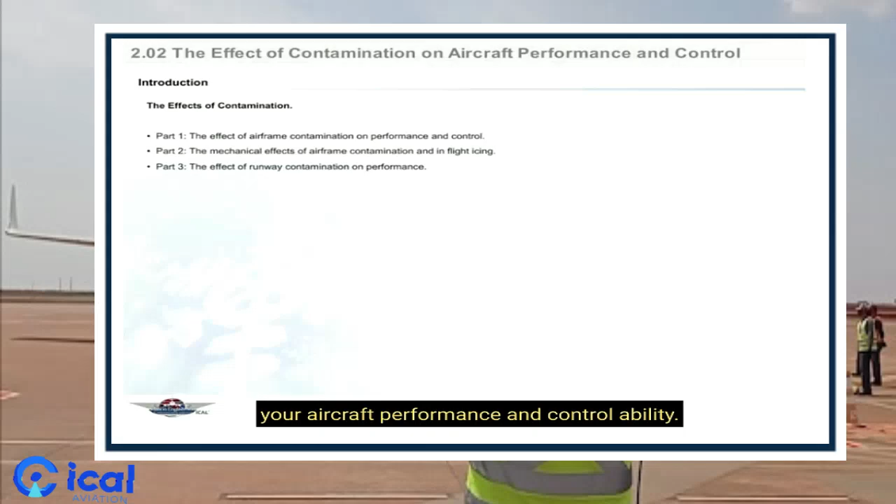We look at the effects of snow and ice contamination on aircraft performance and control. Your learning objectives for this lesson are listed here. It's important to appreciate how and by how much ice and snow can affect your aircraft performance and control ability.

So, for ease of understanding, we have separated the effects of contamination into three categories: the effect of airframe contamination on performance and control, the mechanical effect of airframe contamination and in-flight icing conditions, and the effect of runway contamination on performance.

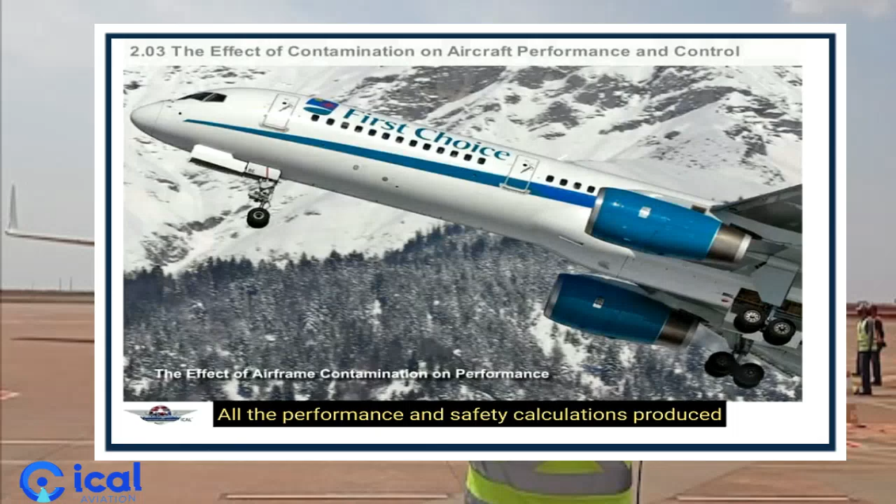All the performance and safety calculations produced by your aircraft manufacturer are based on the assumption that the aircraft is clean. To put it another way, none of your performance calculations will be valid if your aircraft's critical surfaces are contaminated. So, in Part 1, to emphasize this point, we will look at how quickly and by how much even small amounts of airframe contamination can degrade performance.

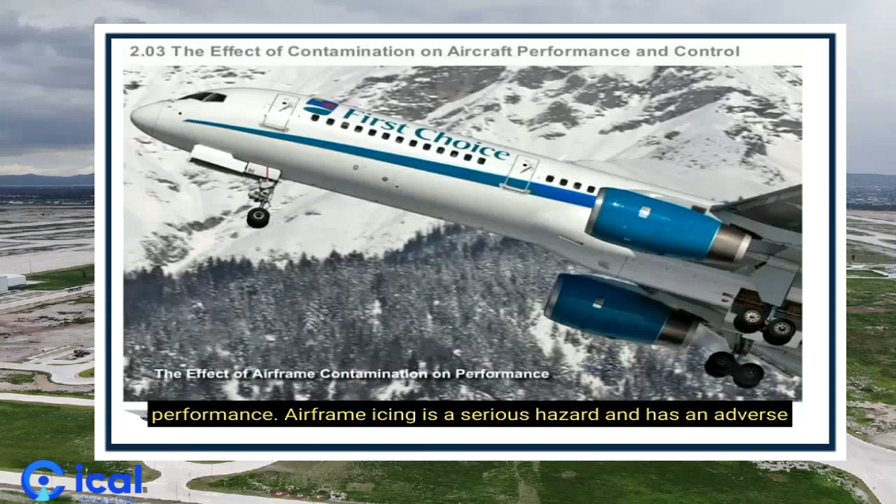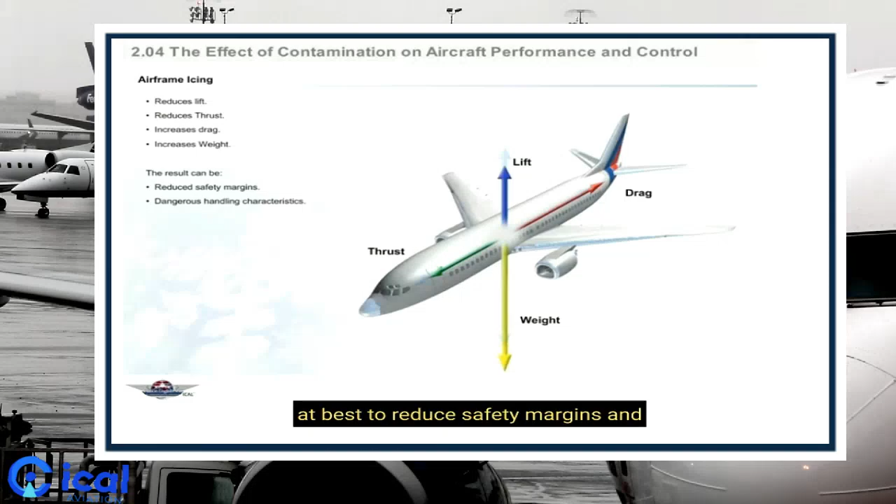Airframe icing is a serious hazard and has an adverse effect on all four forces acting on the aircraft. Degraded aerodynamics and reduced thrust, combined with increased weight and increased drag, can lead at best to reduced safety margins and at worst to dangerous handling characteristics. Let's look at some of the effects in more detail.

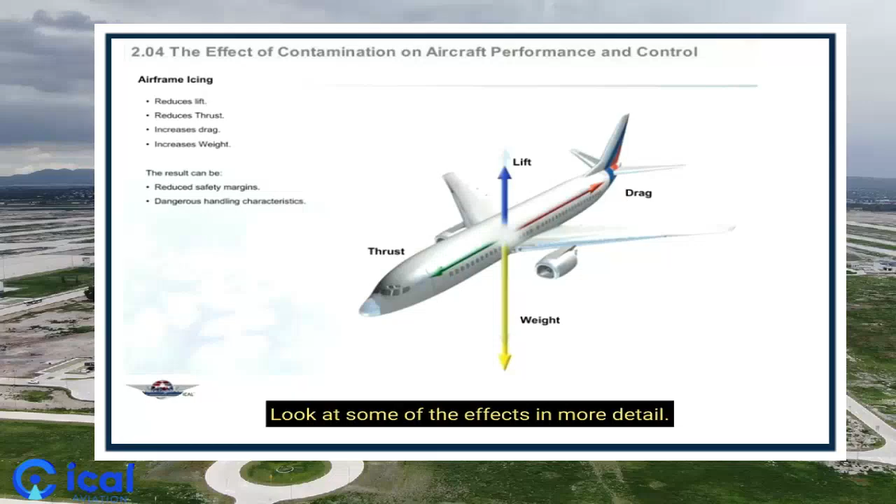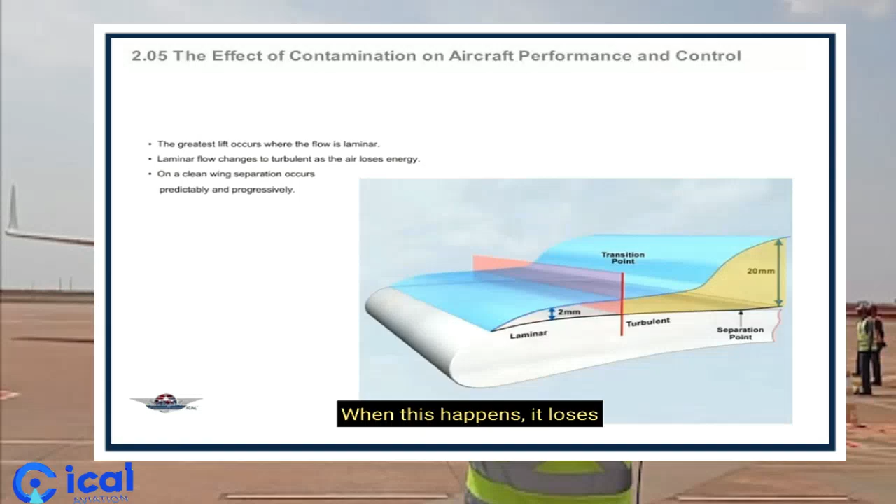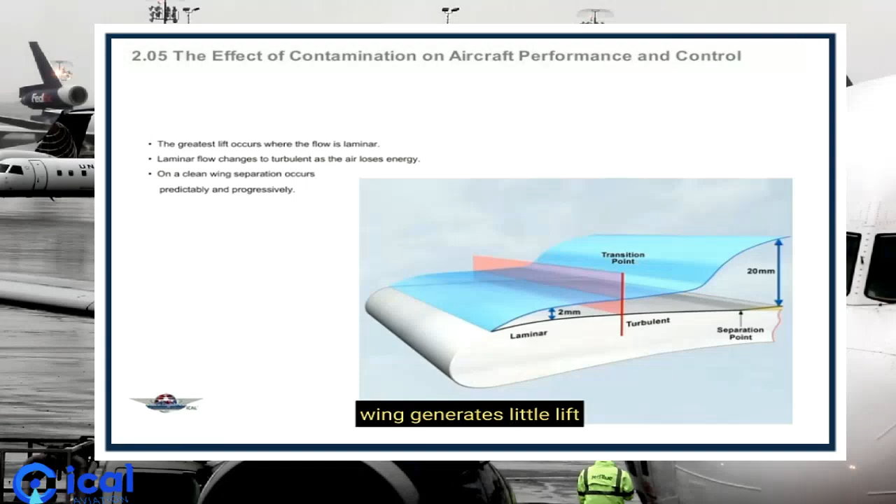The vast majority of lift is produced where airflow over the upper surface of the wing is laminar and attached. Laminar flow breaks down when the air in the boundary layer begins to lose its energy. When this happens, it loses speed and becomes turbulent. The boundary layer thickens and eventually flow separates from the upper surface. Beyond the separation point, the wing generates little lift. On a clean wing, the designer ensures that separation occurs predictably and progressively.

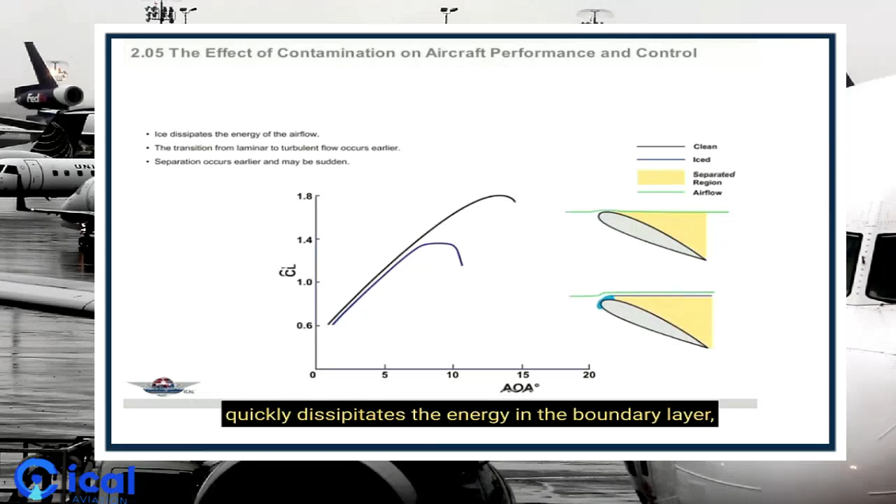The story is very different if the wing is contaminated with ice. The increased surface roughness quickly dissipates the energy in the boundary layer, leading to earlier separation and loss of lift. Most critically, separation is no longer controlled and progressive. It will occur at a lower angle of attack and may happen very suddenly.

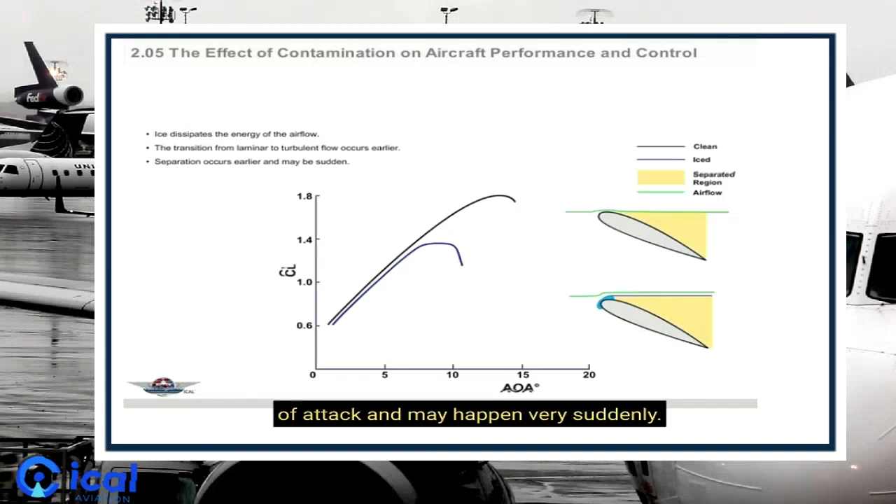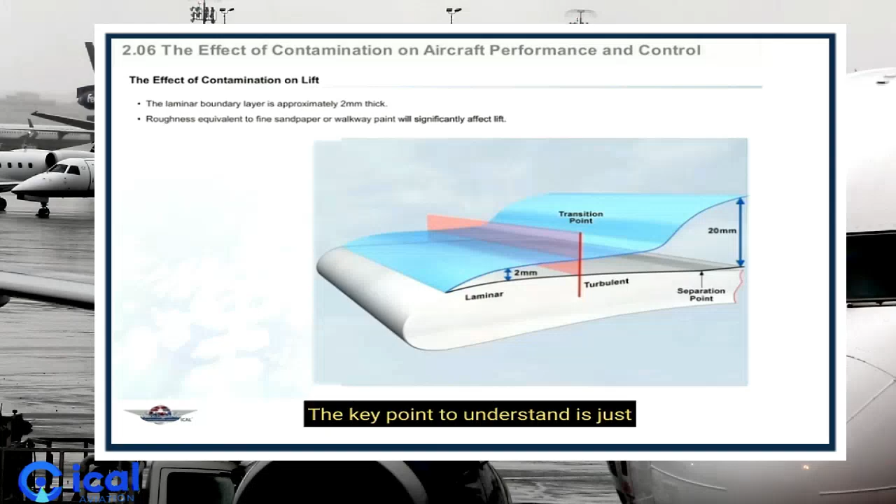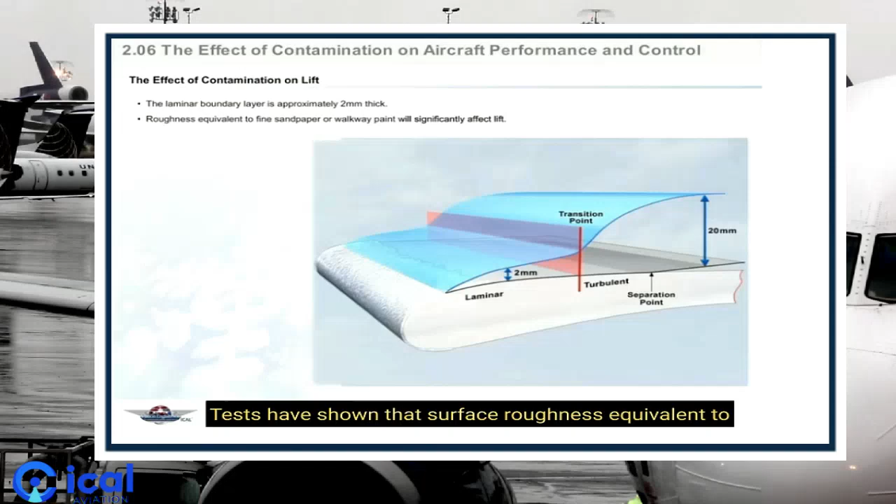The key point to understand is just how little surface roughness is needed to disrupt the laminar boundary layer. The layer is only a few millimeters thick, so even a very small amount of frost or ice will have a very large effect on the ability of the wing to generate lift. Tests have shown that surface roughness equivalent to fine-grade sandpaper or wing walkway is enough to produce a significant degradation of lift.

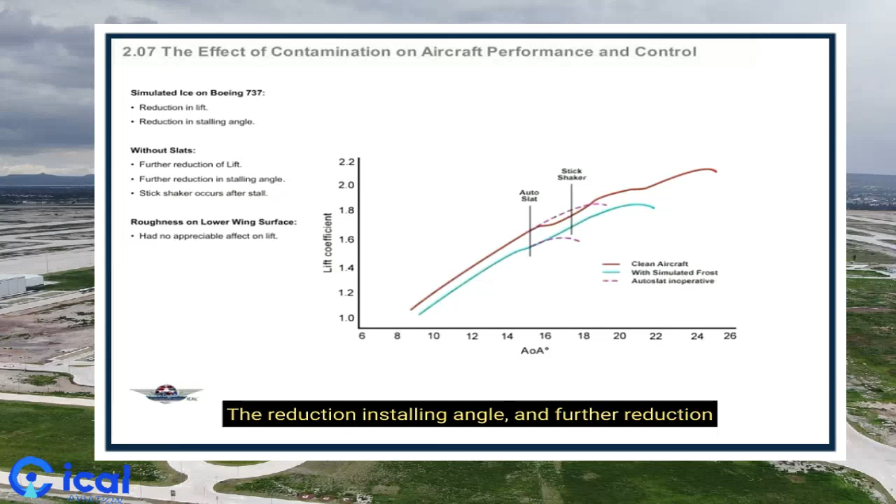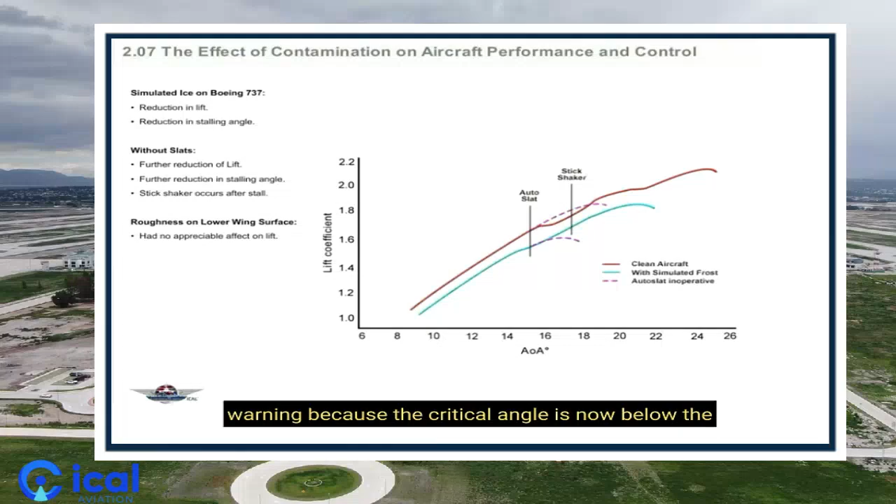The graph here is the result of practical flight trials carried out by Boeing using wing walkway paint to simulate frost. Notice the reduction in overall lift, the reduction in stalling angle, and the further reduction if the slats are unavailable. In the latter situation, there will be no stall warning because the critical angle is now below the angle of attack that triggers the warning.

Boeing also found that simulated frost on the leading edge alone caused almost the same effect as contamination over the entire upper wing surface. By contrast, roughness on the lower wing surface produced only small effects.

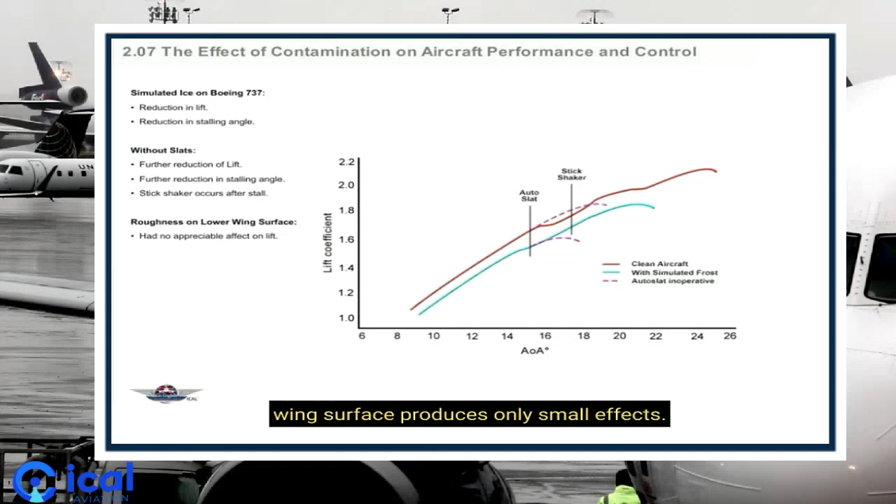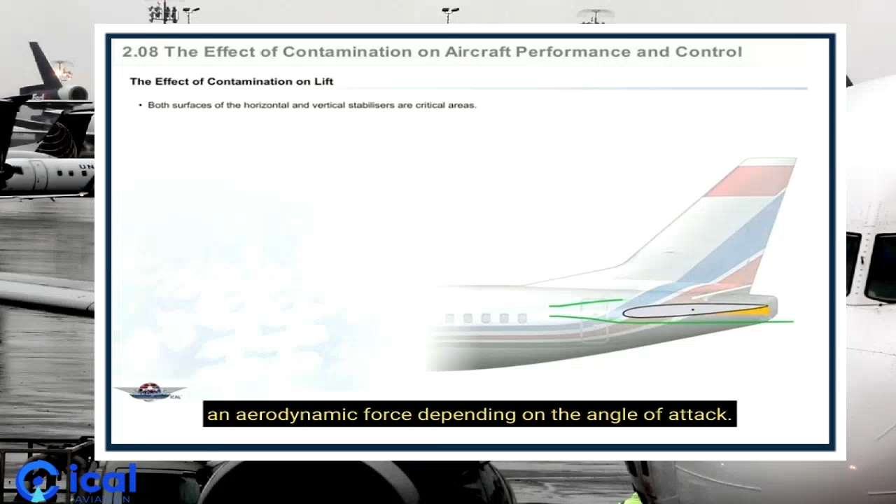Unlike the wing, both surfaces of the horizontal and vertical stabilizers can suffer serious degradation. This is because either surface is used to generate an aerodynamic force depending on the angle of attack. For this reason, both surfaces of the stabilizers must be kept completely clear of all contamination.

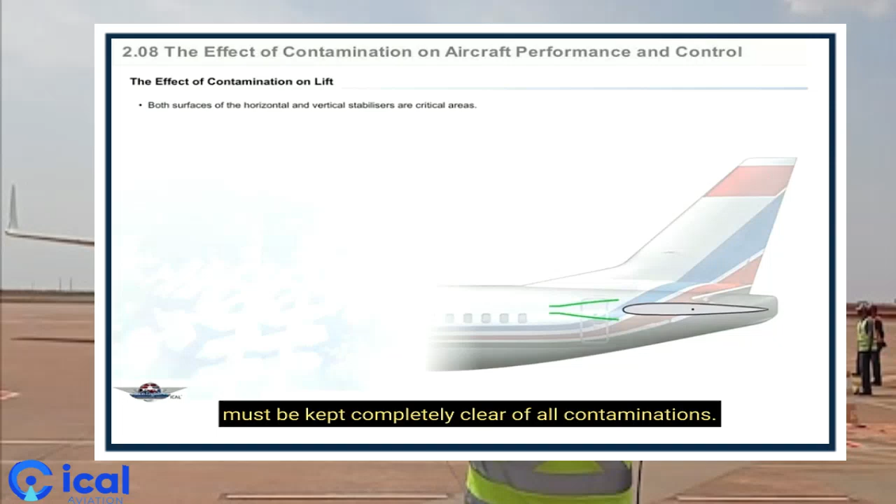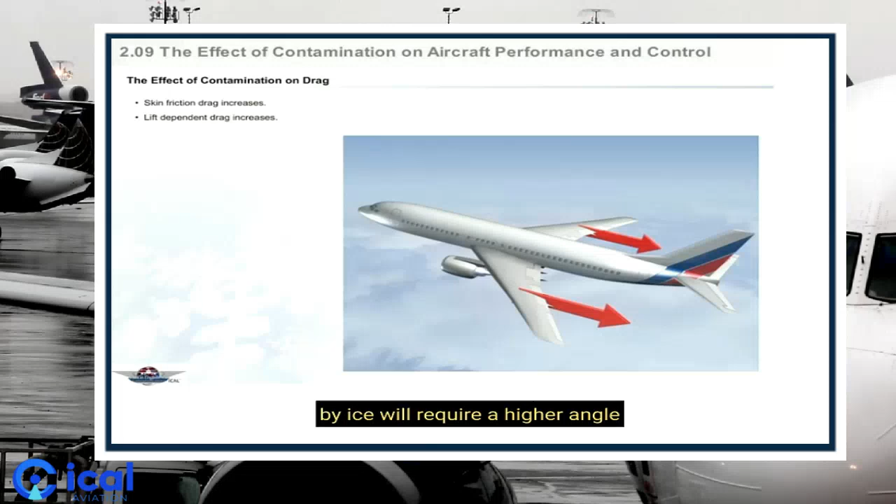Ice contamination also has an adverse effect on drag. Firstly, the surface roughness of the ice will increase skin friction. Secondly, the reduction in lift caused by ice will require a higher angle of attack to lift the weight. This increases lift-dependent drag. The effect of frost contamination on drag may be relatively modest, but we will see later in this lesson that other types of icing can cause a huge increase.

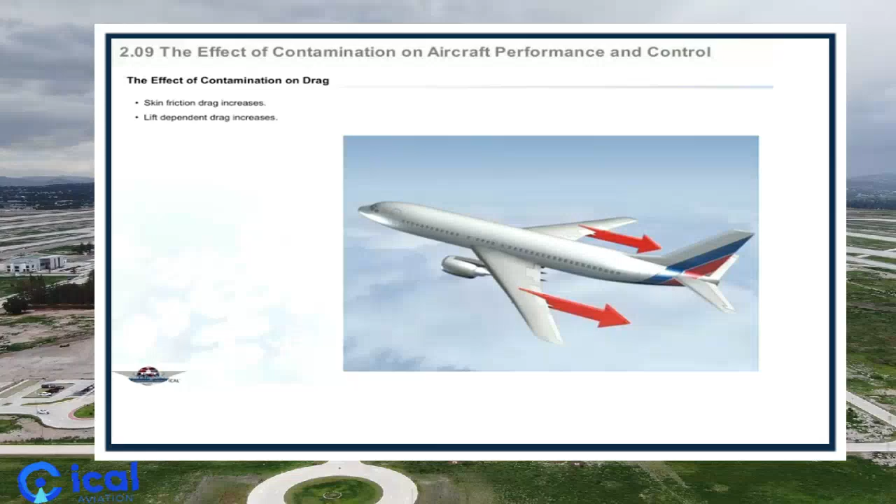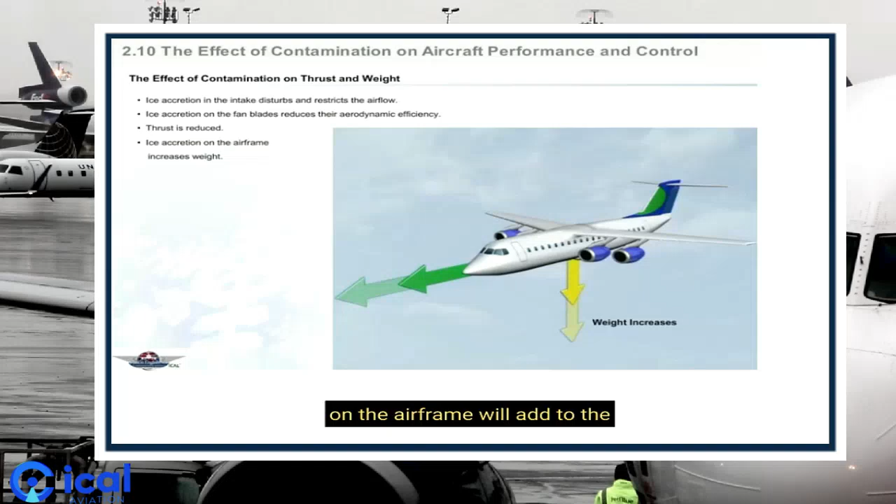As well as reducing lift and increasing drag, ice also affects the other side of the equation. Ice accretion in the intake and on the fan or propeller blades will reduce air mass flow and aerodynamic efficiency. This reduces thrust and gives you less margin to counteract the increase in drag. Similarly, the weight of the ice accumulating on the airframe will add to the problems already caused by loss of lift.

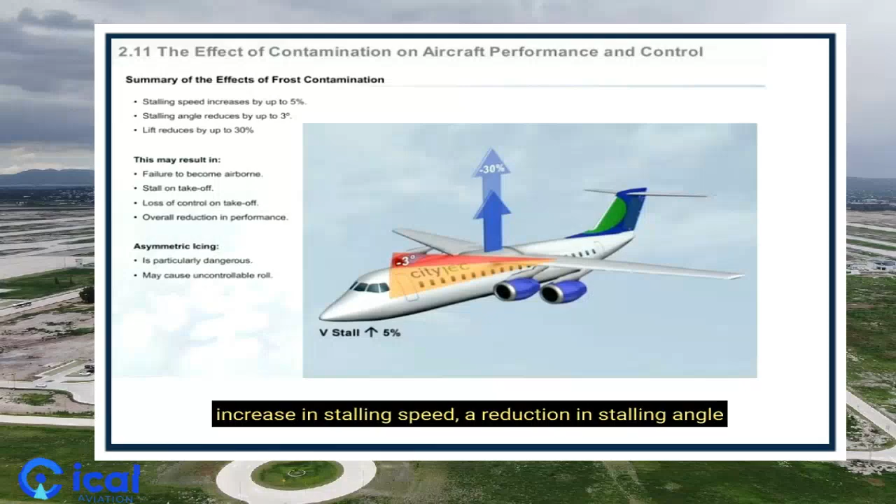Frost on the upper wing surface will cause an increase in stalling speed, a reduction in stalling angle by up to 3 degrees, and a reduction in lift of up to 30%. Drag and, to some extent, weight will increase, so the overall effect will be a marked reduction in performance. In extreme cases, you may not be able to climb out of ground effect, or you may stall on rotation.

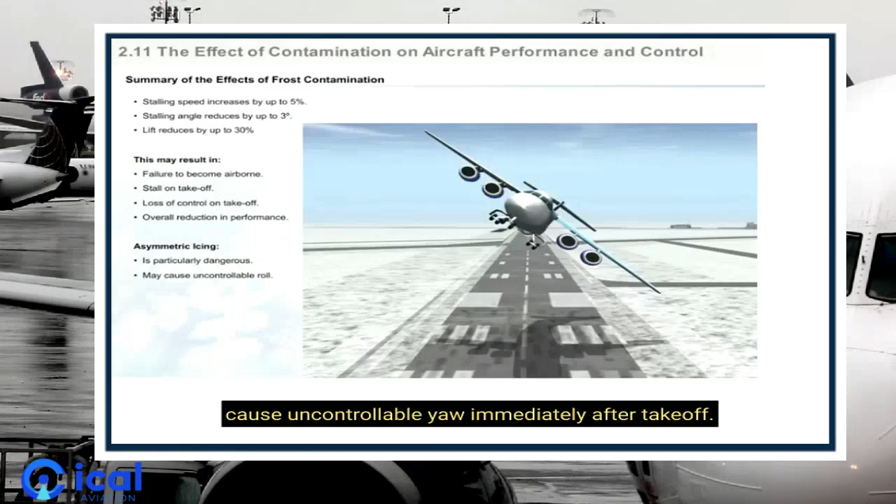Asymmetric icing is particularly dangerous and may cause uncontrollable roll immediately after takeoff. We've seen the effects of a relatively thin layer of frost.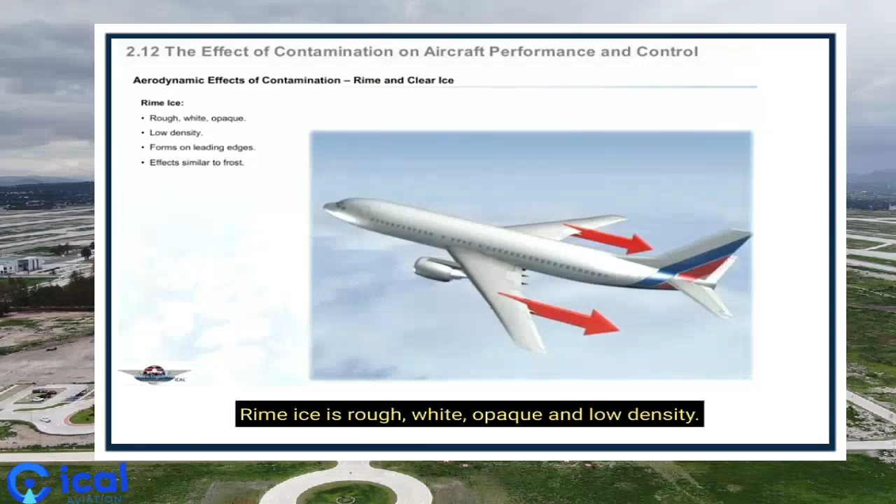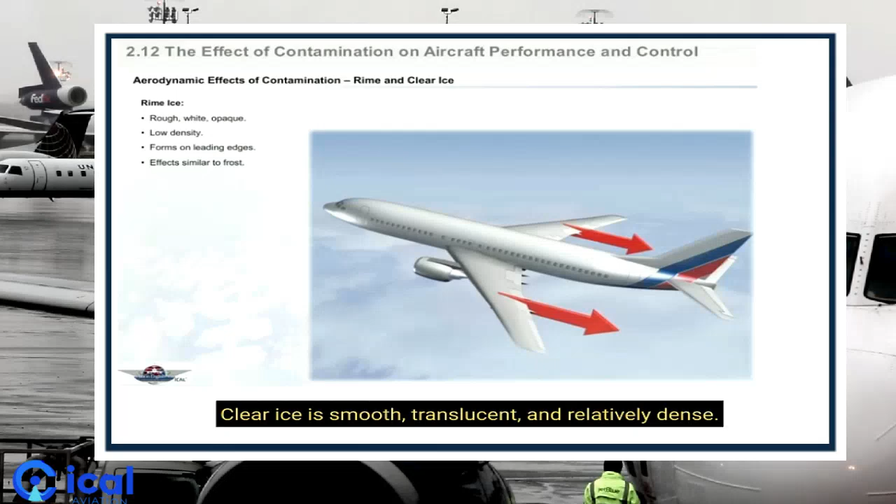So now let's look at two other forms of icing that can occur in the air: rime ice and clear ice. Rime ice is rough, white, opaque, and low density. It tends to form on the leading edges, and being rough produces effects like frost contamination. Clear ice is smooth, translucent, and relatively dense. It is altogether more serious a problem because it can accrete rapidly and add significant weight.

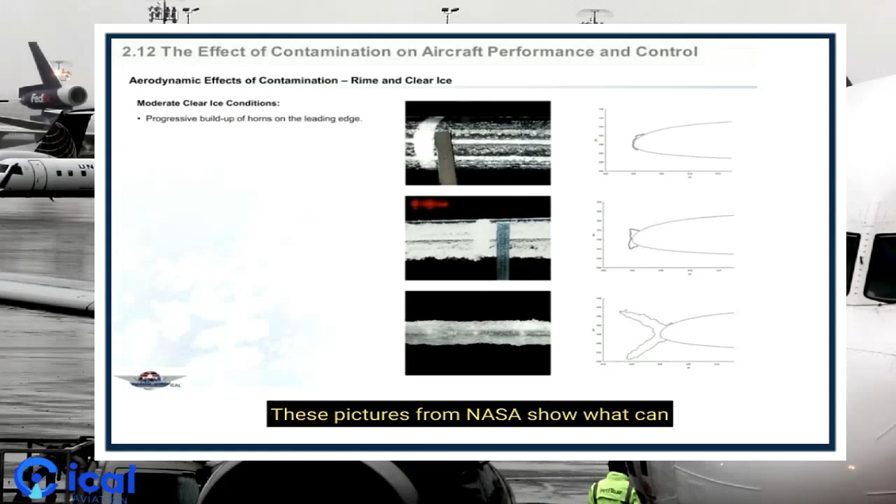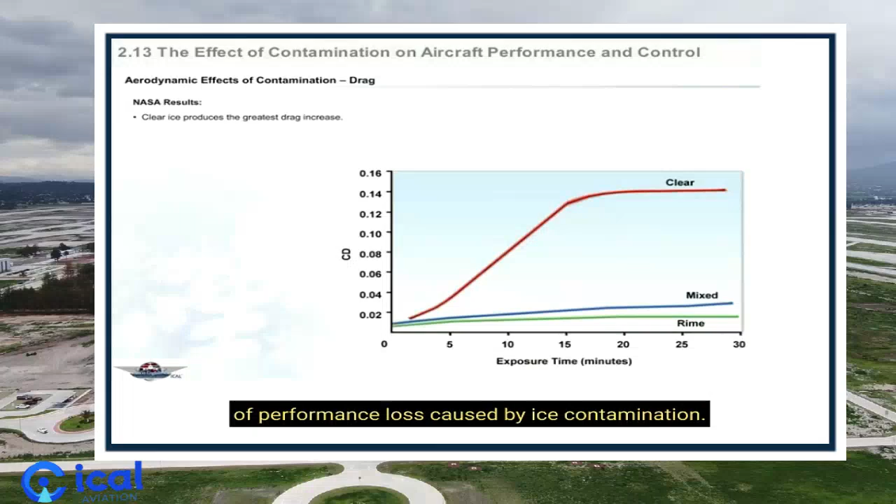These pictures from NASA show what can happen to a tailplane leading edge in light to moderate clear ice conditions. This diagram shows the increase in drag caused by clear and rime ice, or a mixture of them, on aircraft using no anti-ice protection in light to moderate icing conditions. It should leave no doubt about the scale of performance loss caused by ice contamination.

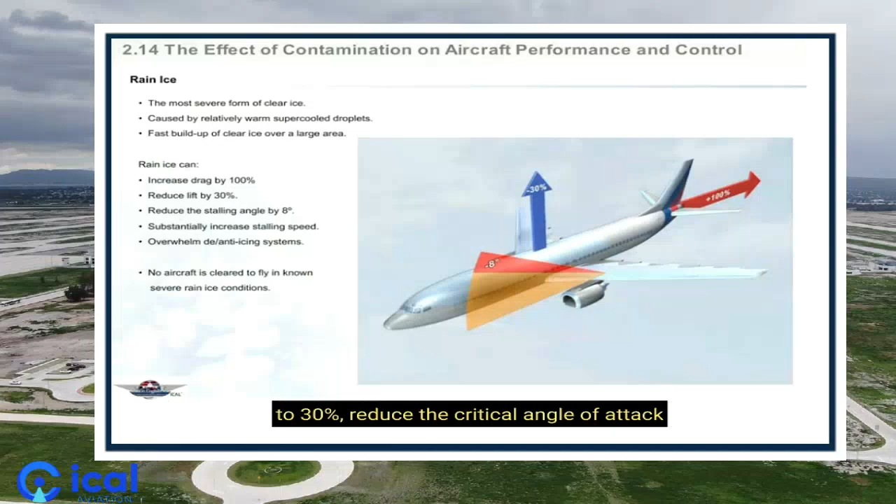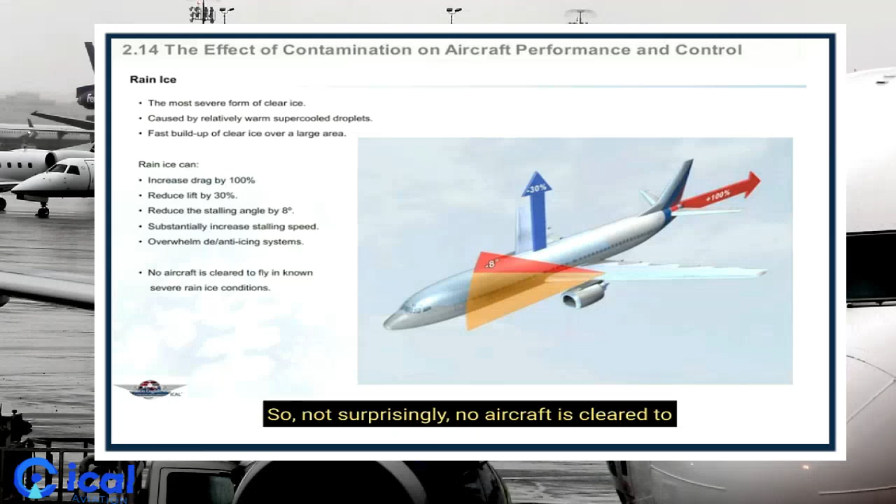The most severe form of clear icing is rain ice. Rain ice can accumulate very quickly and over a large area. It can take as little as 2 to 3 minutes of accumulation to increase drag by up to 100%, reduce maximum lift by up to 30%, reduce the critical angle of attack by 8 degrees, and substantially increase stalling speed. Under such conditions, ice protection systems may be overwhelmed. So not surprisingly, no aircraft is cleared to fly in known severe rain ice conditions.

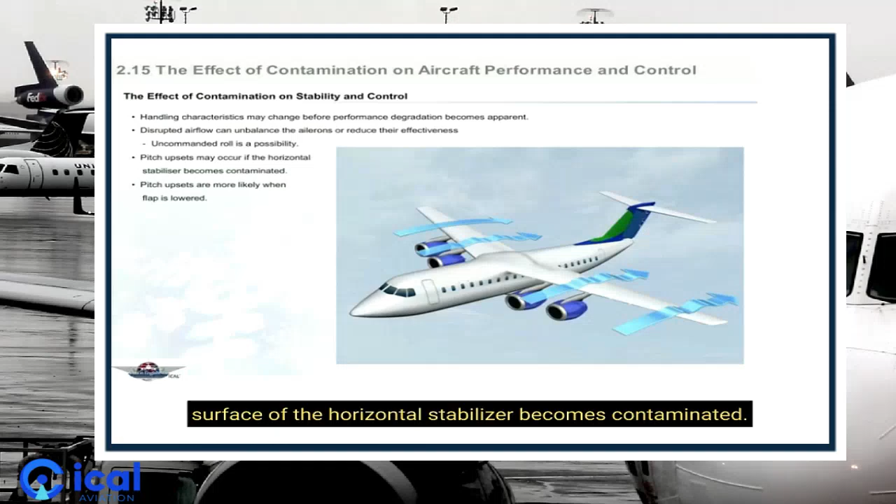Accumulation of ice can also affect the aircraft's handling characteristics even before any degradation in performance becomes apparent. Disruption of the airflow over the ailerons can reduce their balance and cause uncommanded roll. Pitch upsets may also occur if the surface of the horizontal stabilizer becomes contaminated. In most commercial aircraft, the four forces arrange to produce a small pitch down moment, which is normally counterbalanced by down force produced by the horizontal stabilizer.

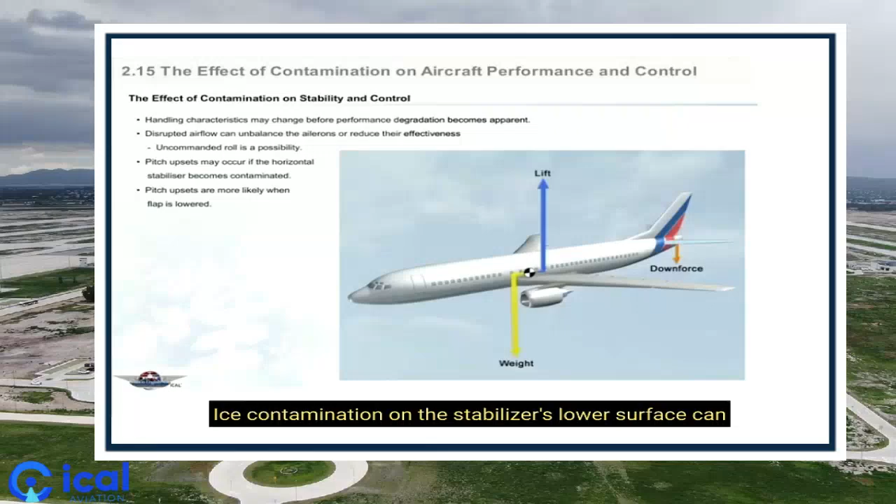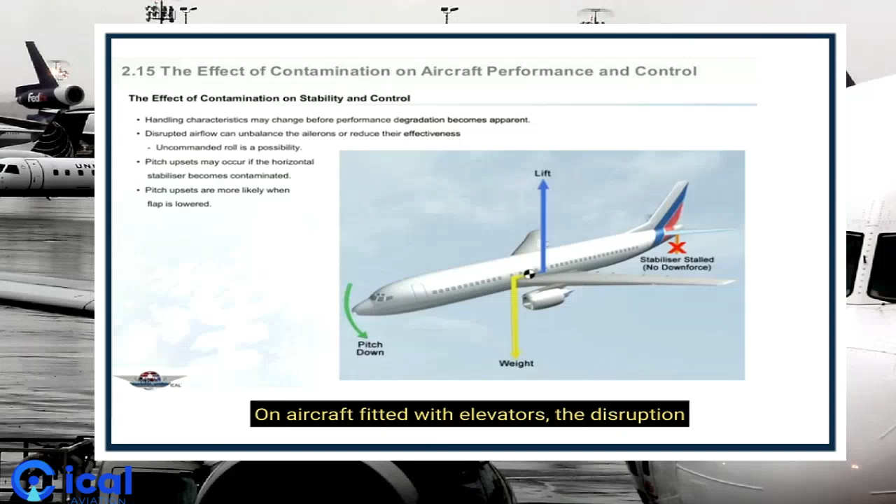Ice contamination on the stabilizer's lower surface can provoke early separation, leading to the loss of downward force and ensuing uncommanded pitch down. This effect is almost always aggravated by lowering flaps, because flaps increase downwash, which increases the stabilizer's angle of attack. This leads to an earlier onset of the stall. On aircraft fitted with elevators, the disruption of airflow can also reduce elevator effectiveness or induce uncommanded oscillations.

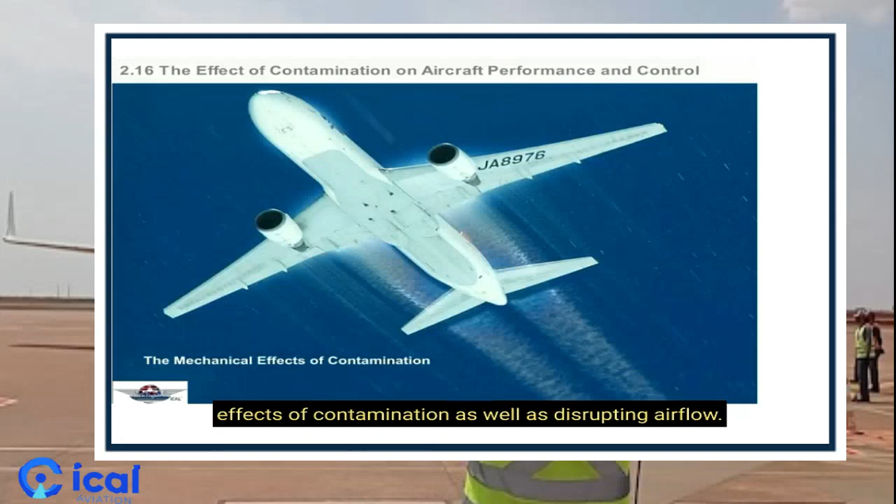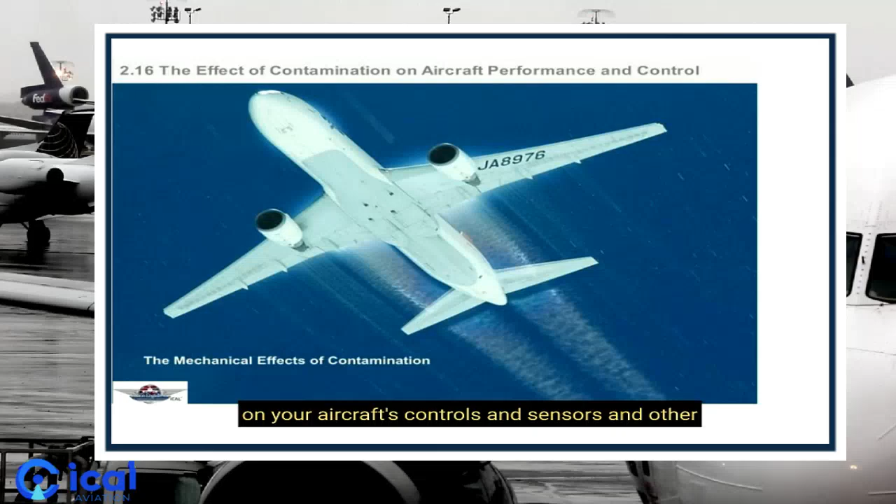In Part 1, we looked at the aerodynamic effects of contamination as well as disrupting airflow. Ice contamination can also have direct mechanical effects on the aircraft's controls and sensors. And other in-flight icing conditions, particularly hail, can have serious consequences for the safety of your aircraft.

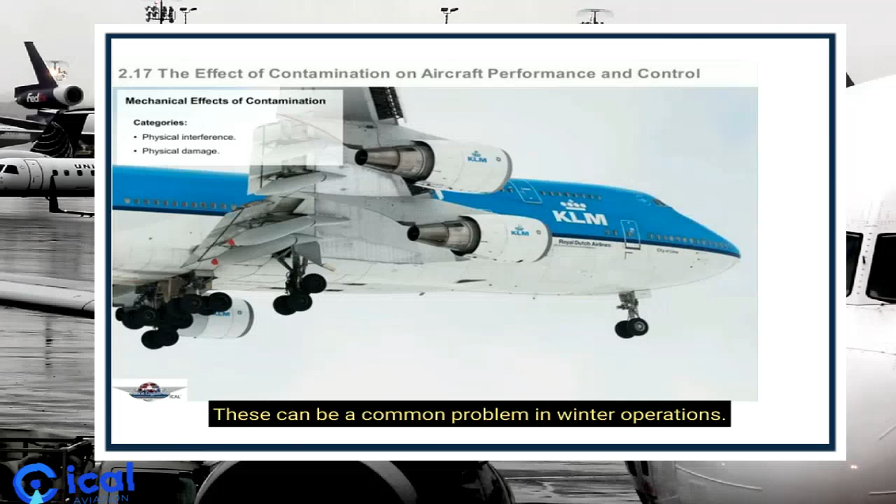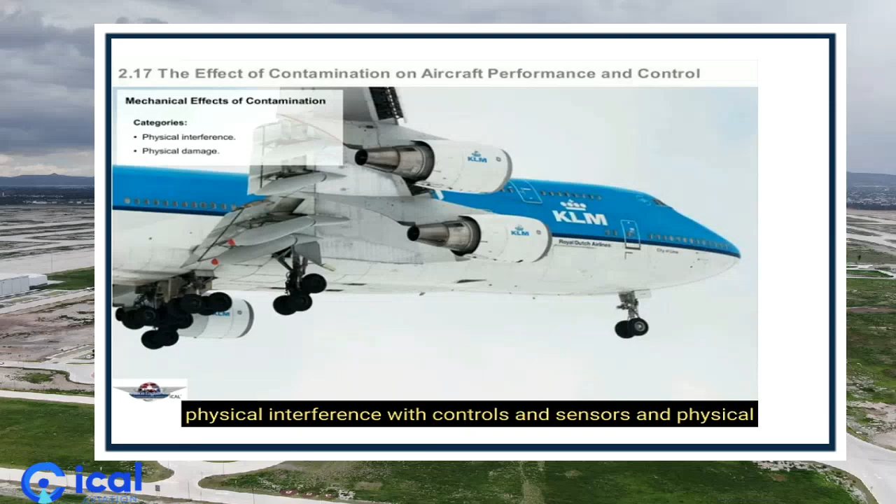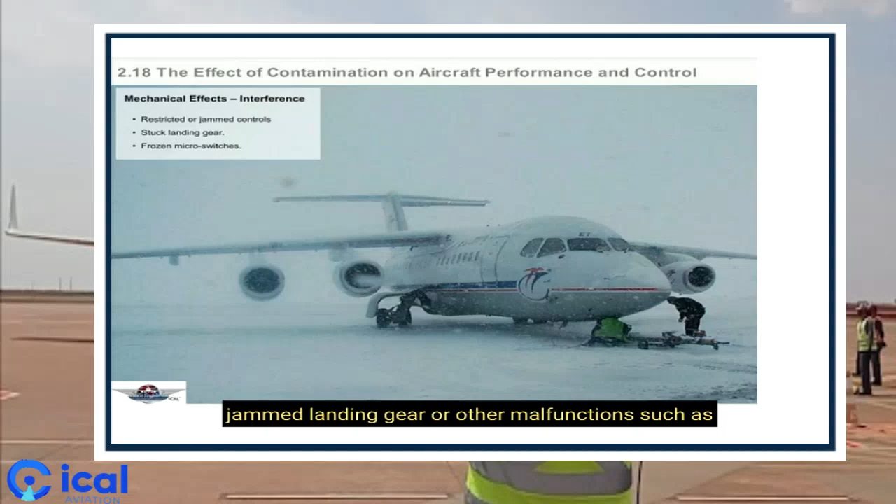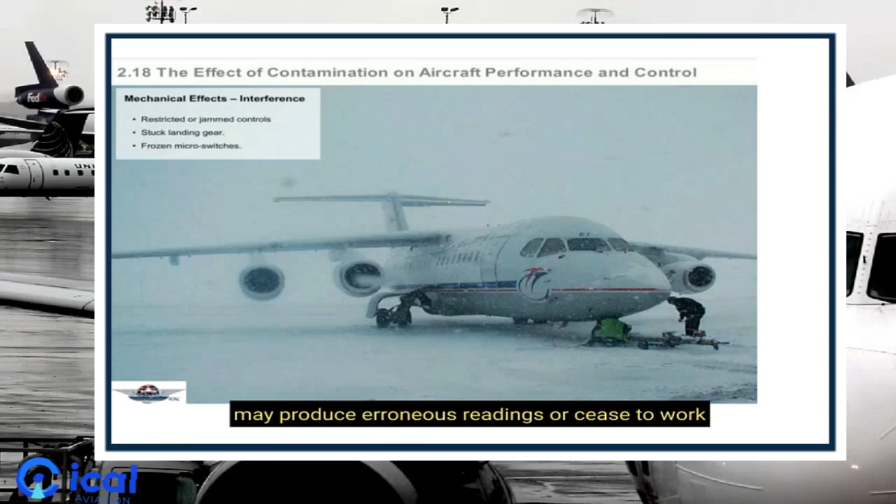By mechanical effects, we mean any physical interference with the aircraft rather than effects caused by aerodynamic factors. These can be a common problem in winter operations. Mechanical effects can be divided into two categories: physical interference with controls and sensors, and physical damage to the airframe or engines. Physical interference may cause restricted or jammed controls, jammed landing gears, or other malfunctions such as frozen microswitches. Static vents, AOA vanes, and other sensors may produce erroneous readings or cease to work altogether if they become contaminated.

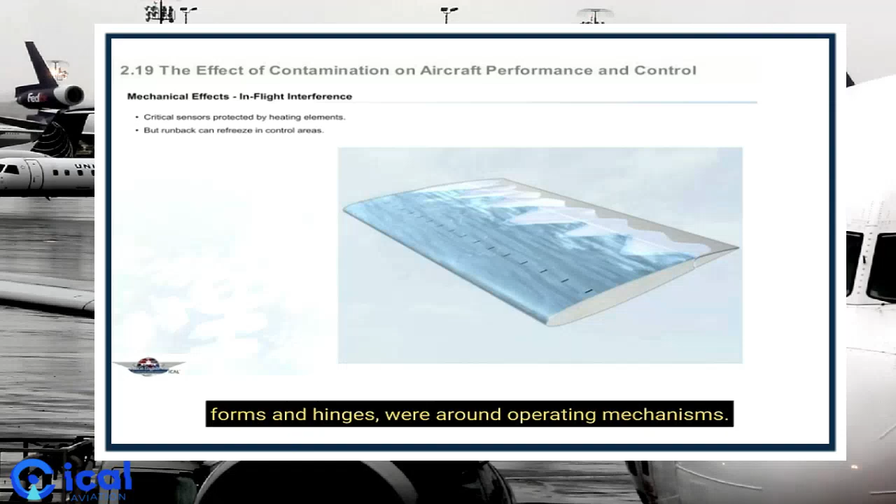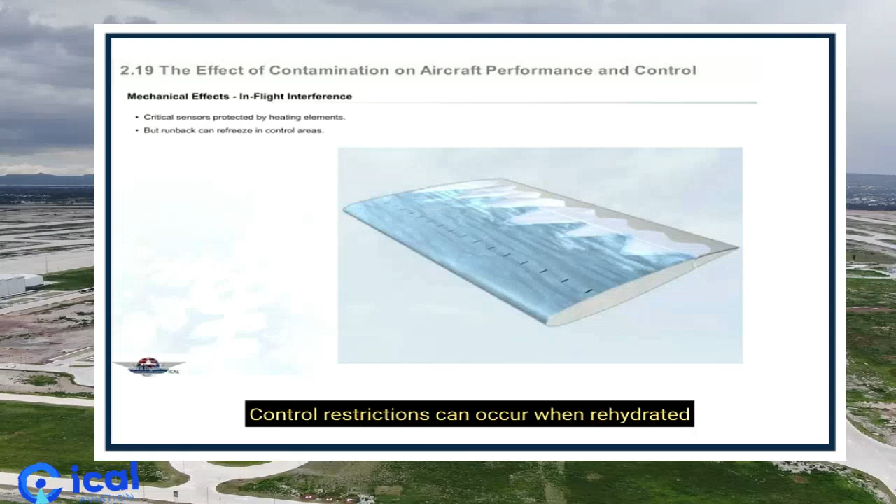In-flight sensors are well protected by heaters from all but the most severe conditions, but control restrictions may occur when ice forms in hinges or around operating mechanisms. This can happen even when anti-icing systems are used because melted ice can run back and refreeze in an area beyond the reach of the anti-icing system. And as we shall see in a later lesson, control restrictions can occur when rehydrated anti-icing residue freezes.

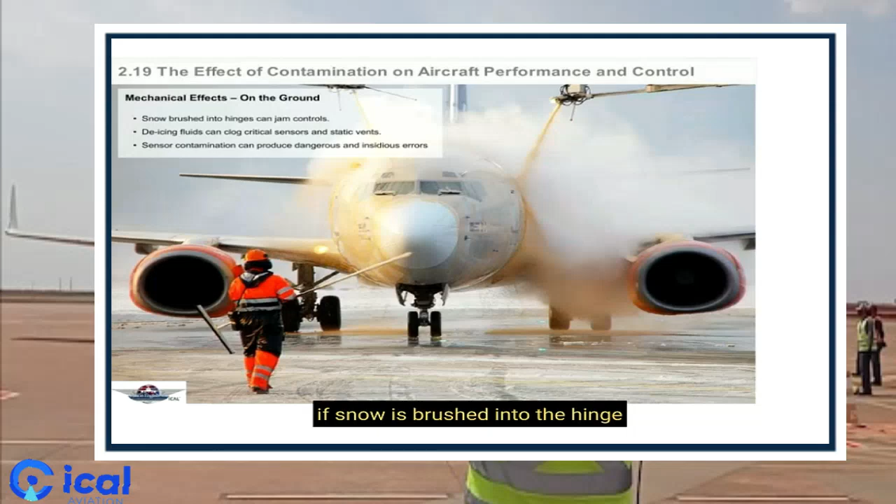On the ground, sensors and controls may become contaminated either by ice or snow or by the consequences of careless or inappropriate de-icing and anti-icing. For example, control surfaces can become jammed if snow is brushed into the hinge areas, and sensors can become contaminated if de-icing fluid is sprayed into their protected areas. Physical restrictions to the primary controls may be readily apparent when you conduct your full and free movement checks, but contamination of sensors can produce dangerous and insidious errors.

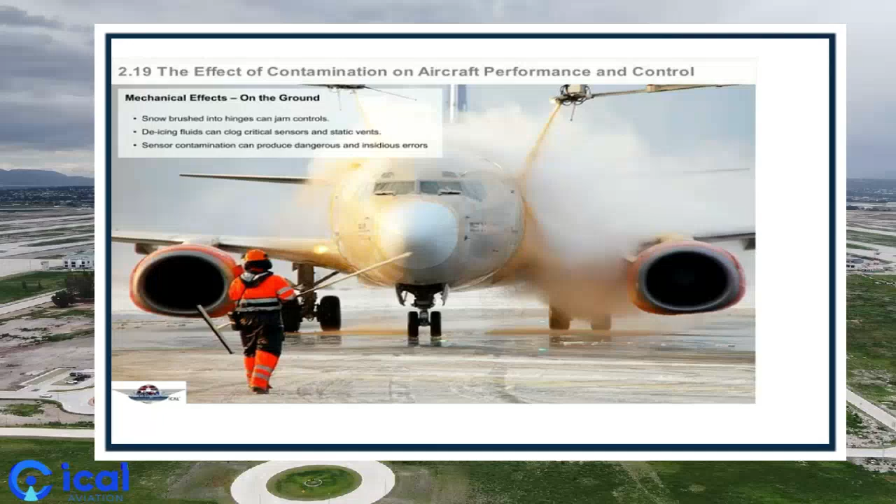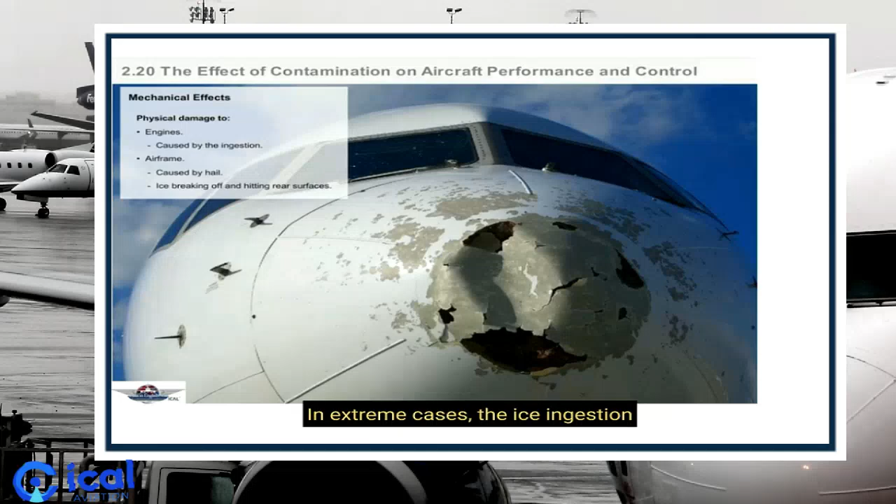The second category of mechanical effect covers damage from ice impact. Ice ingestion can cause engine flameout or damage engine vanes and blades. In extreme cases, ice ingestion has caused catastrophic engine failure. Serious damage can occur to the airframe by impacts from large hail or from ice breaking off and hitting the rear surfaces.

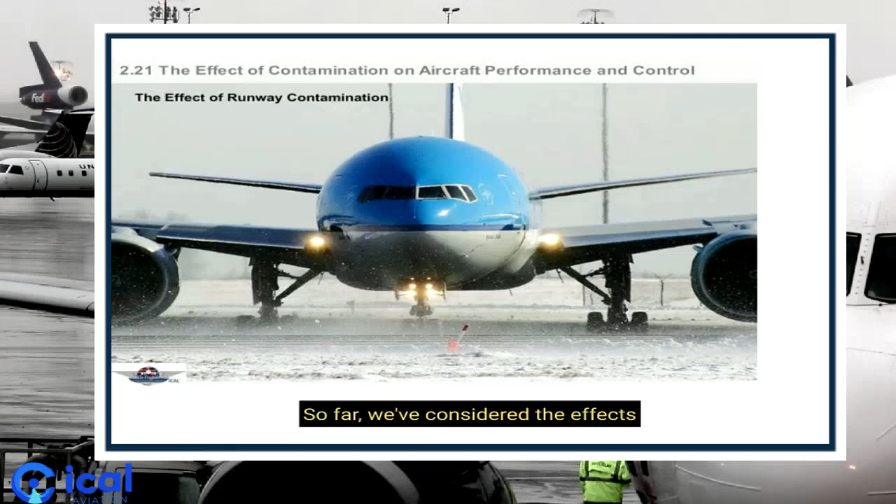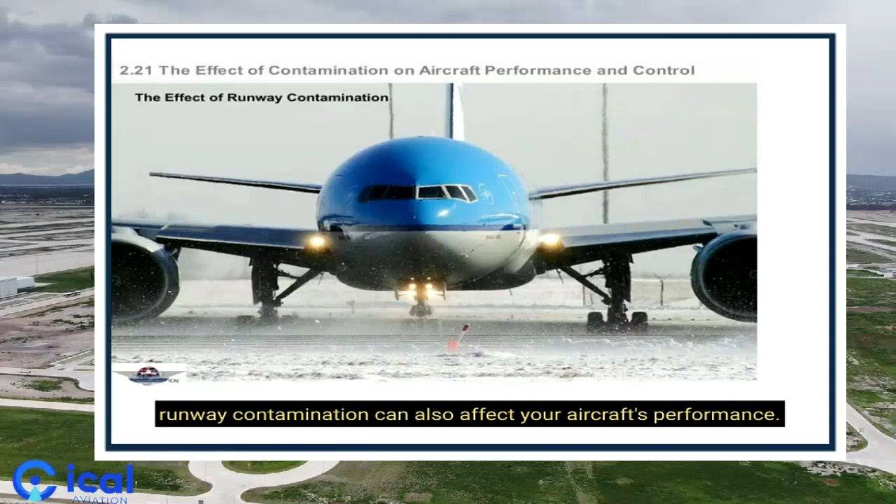So far, we've considered the effects of contamination on the airframe. In this final part, we will look at how runway contamination can also affect your aircraft's performance. A runway is considered to be contaminated where more than 25% of the surface area is covered by standing water, slush, or loose snow with a water equivalent depth exceeding 3 millimeters, or when it is covered by compacted snow, ice, or wet ice.

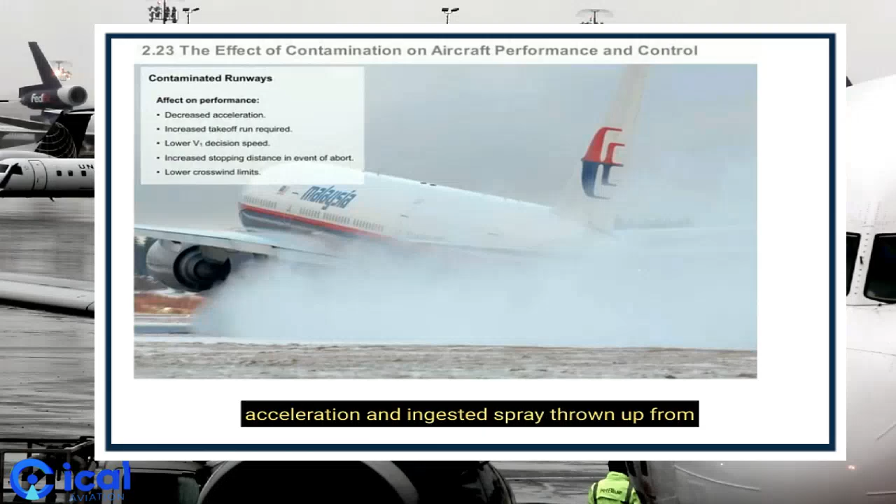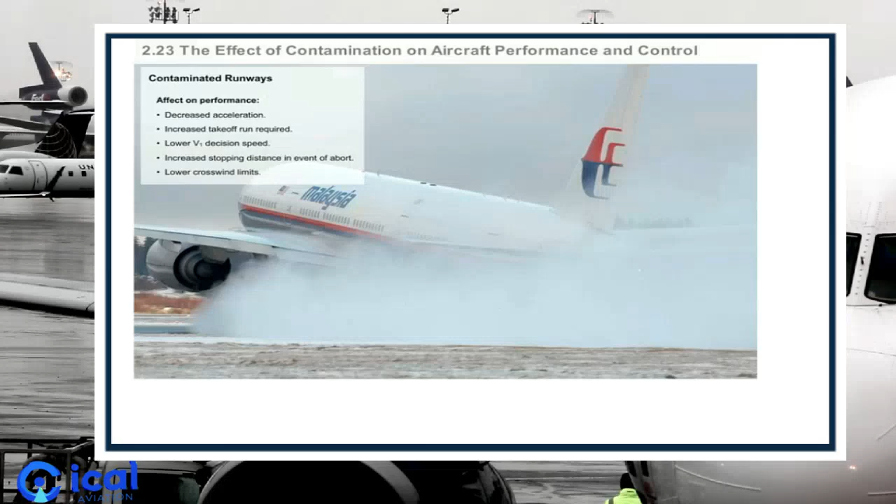Contaminants on the runway will retard acceleration, and ingested spray thrown up from the runway may reduce engine thrust. Either will result in an increased takeoff roll. Similarly, a lower decision speed may be required to take account of the reduced braking efficiency in the event of an abort. Contamination can also affect directional control, so the crosswind limits are likely to be lower.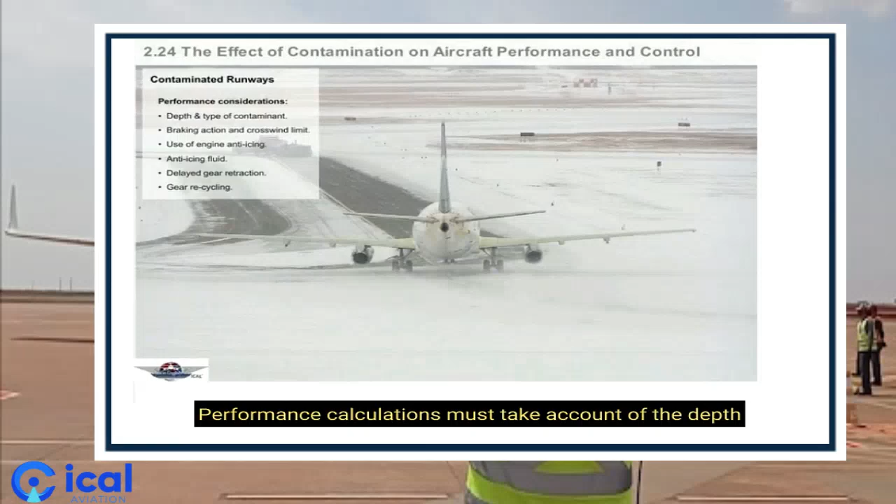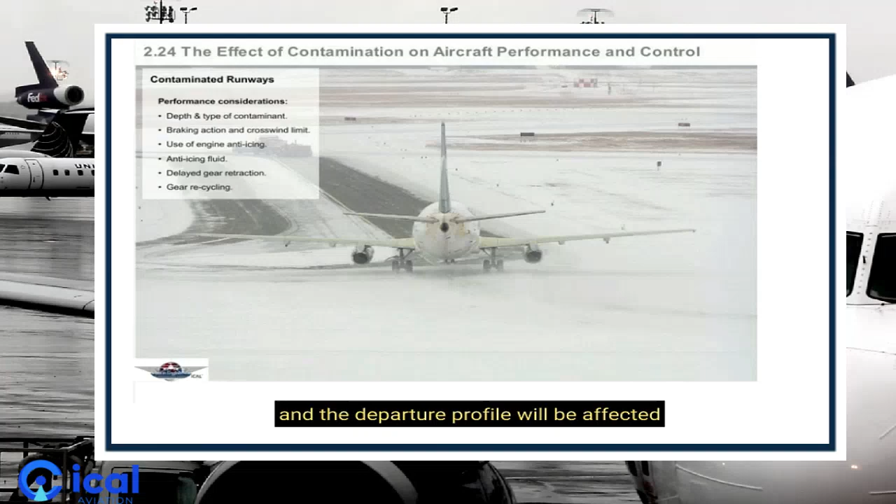Performance calculations must take account of the depth and type of contaminant, the braking action and associated crosswind limits, and the use of engine anti-icing or any anti-icing fluid applied to the aircraft. Remember that the net takeoff flight path and the departure profile will be affected by any delayed gear retraction or gear recycling.

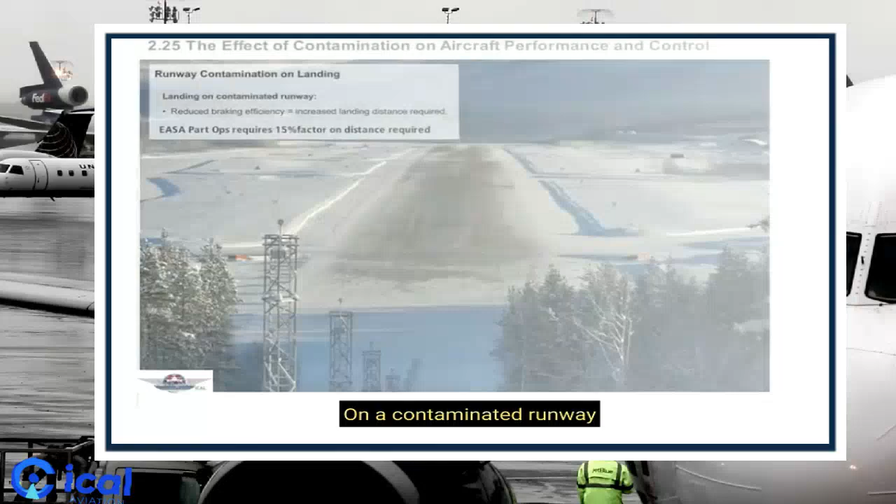Landing on a contaminated runway also requires special consideration. The principal concern will be reduced braking performance. One of the main risks of landing on a contaminated surface is the risk of hydroplaning. There are three types of hydroplaning: viscous, dynamic, and reverted rubber.

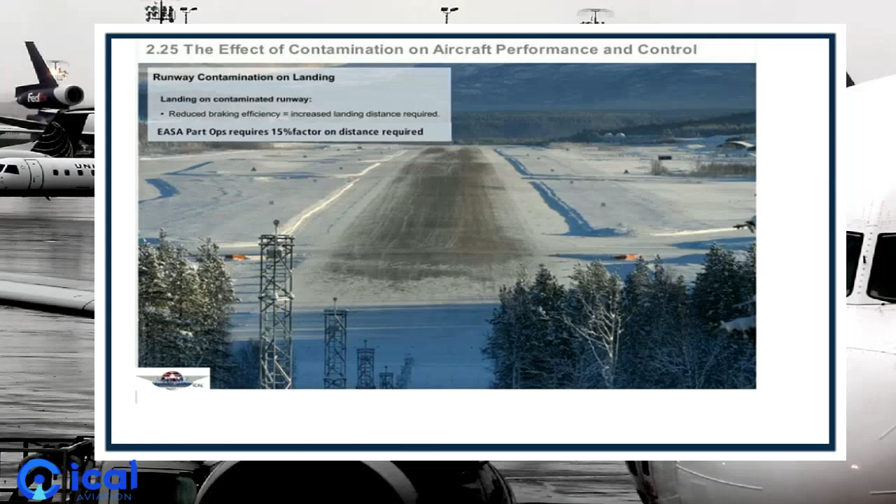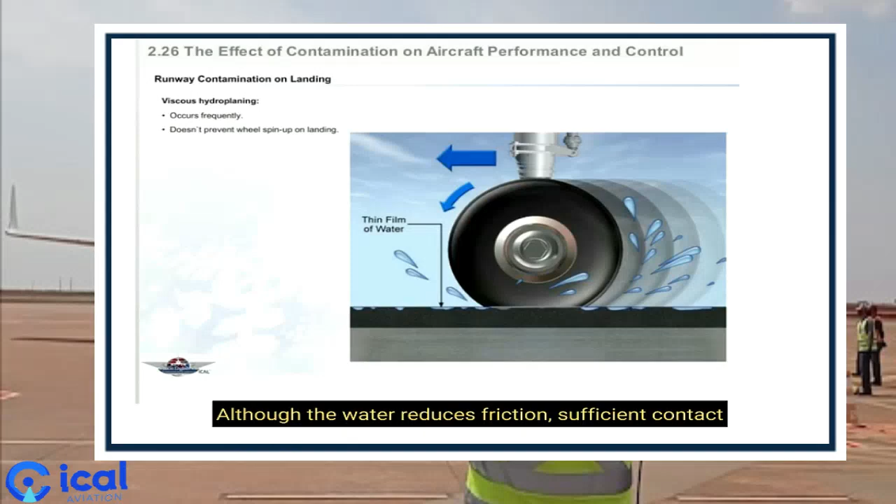Viscous hydroplaning occurs frequently on wet runways and is caused by the normal lubrication effect of water. Although the water reduces friction, sufficient contact is made between the tire and the runway surface to allow the wheels to spin up and initiate the anti-skid system.

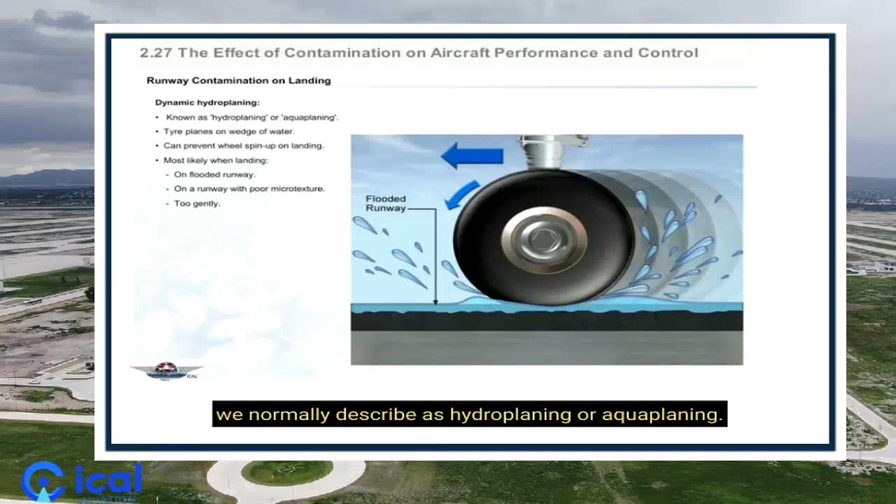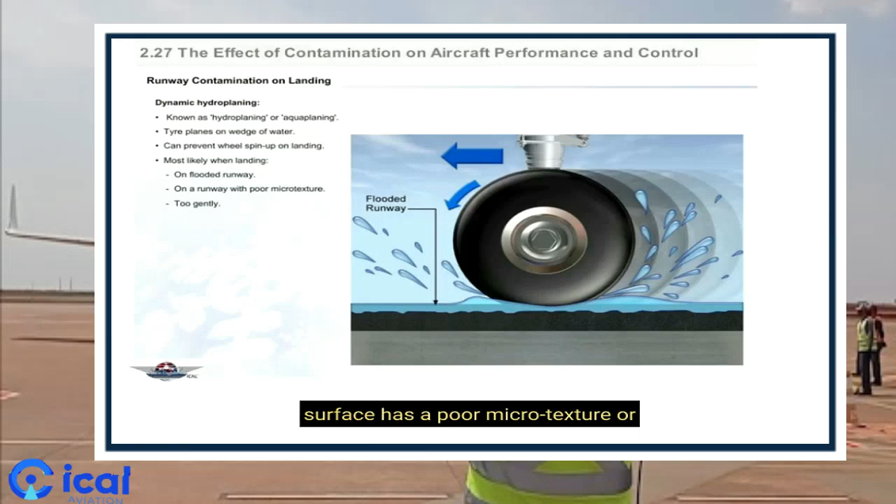Dynamic hydroplaning is the technical term for what we normally describe as hydroplaning or aquaplaning. In this case, the tire is completely lifted off the runway by the wedge of water. This can prevent the wheel from spinning up. Dynamic hydroplaning occurs most often on flooded runways. It is most likely if the runway surface has a poor micro texture or if the landing itself is particularly gentle.

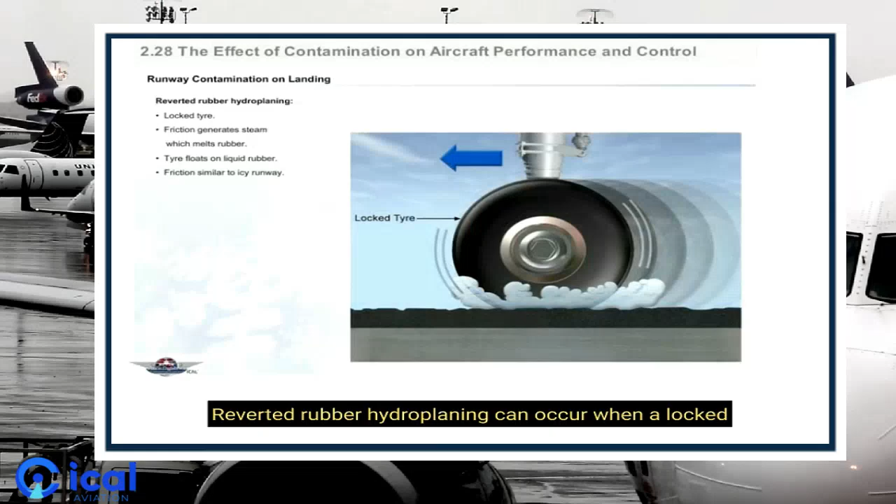Reverted rubber hydroplaning can occur when a locked tire skids along a wet or icy runway long enough to generate significant heat. The heat generates steam, which lifts the tire off the runway and reverts the rubber to a gummy mass. The tire then floats on the liquefied rubber, reducing friction to that of an ice-covered runway.

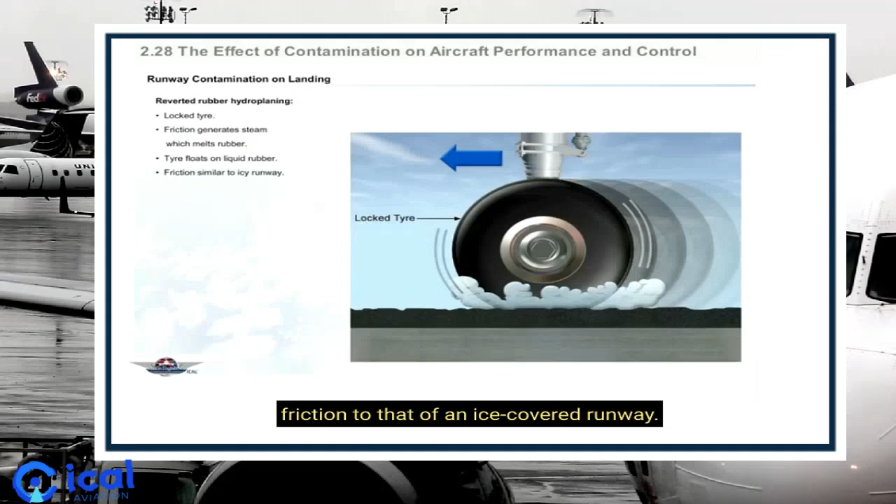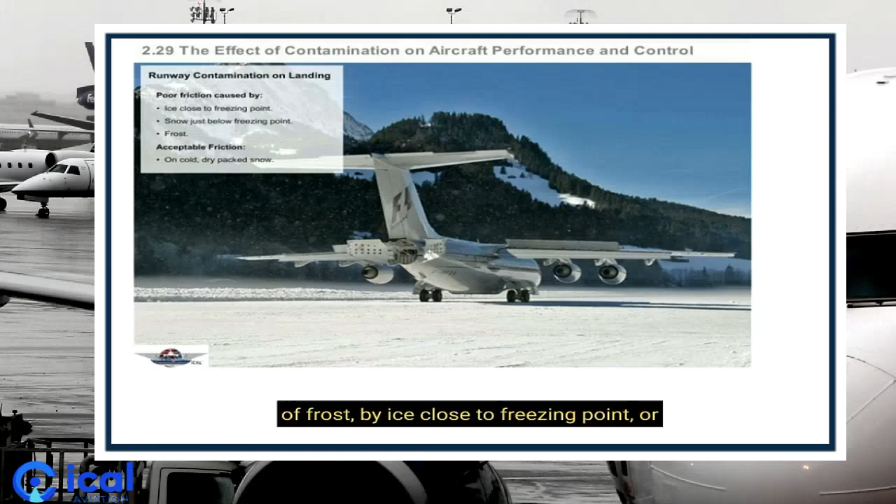Poor surface friction can be caused by a layer of frost, by ice close to freezing point, or by a covering of snow just below freezing point. In colder conditions, particularly where dry snow has been below -5 degrees for more than 24 hours, braking action can be acceptable.

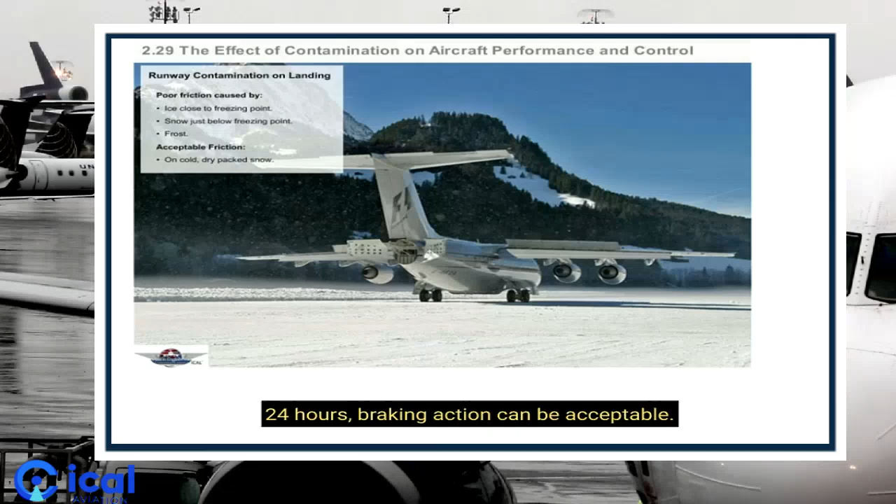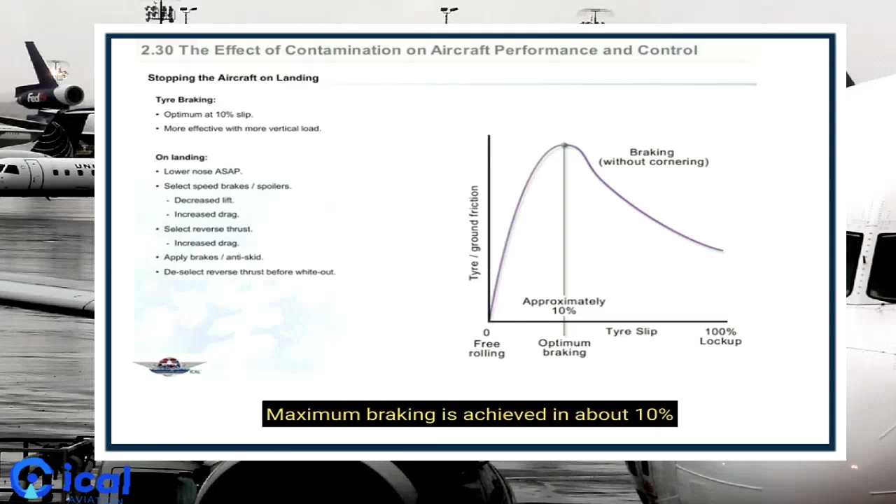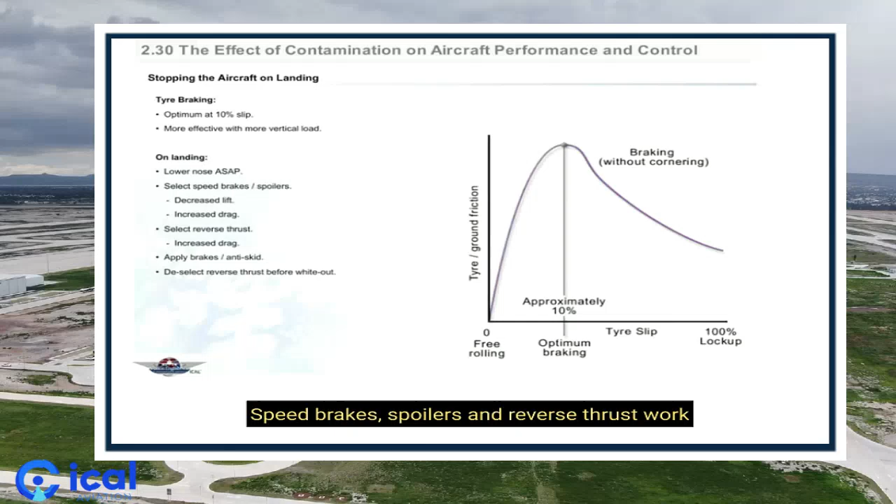When brakes are applied, the tire is made to roll slower than its free rolling speed. The result is slip. Maximum braking is achieved at about 10% slip, but the available braking force depends on the vertical load on the tire. Therefore, any action that improves the vertical load as soon as possible after touchdown will enhance the available braking effort. Speed brakes, spoilers, and reverse thrust work most effectively at high speeds and are not affected by runway contamination.